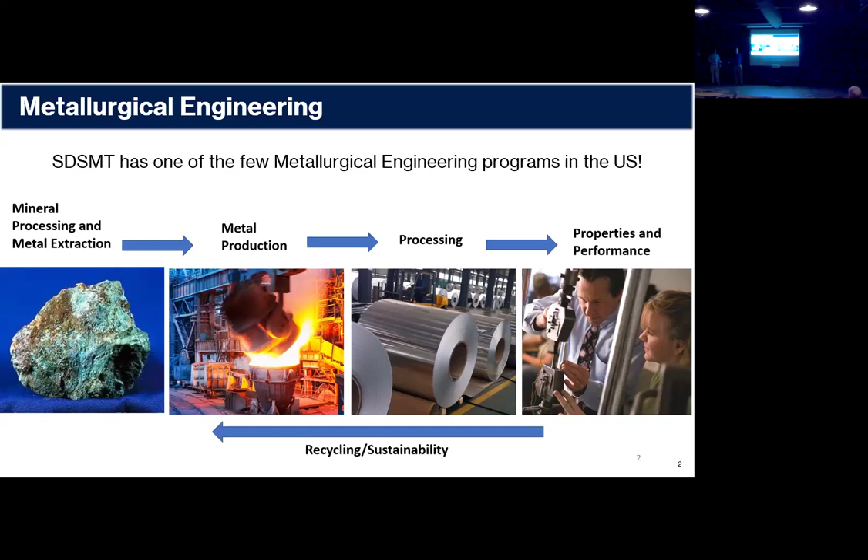Of great interest is the fact that metallurgy is one of the most important and fundamental studies for the upkeeping of our society, since we provide the raw materials, the raw metals, for every other profession in the world. The TMS Bladesmithing Competition is a biennial international competition hosted by the Minerals, Metals, and Materials Society. It started in 2015 to broaden the public's understanding of material science and to provide a competitive spirit to the students in metallurgy. You can consider this to be a lot like Forged in Fire, just a lot more technical, since it involves a technical report, a memo, and a video describing everything. Since its inception in 2015, I can proudly say that SD Mines has submitted a blade for every competition and has taken home many notable prizes.

The inspiration behind our 2024 blade is a sword found at the Sutton Hoo burial site on the eastmost side of Great Britain, specifically the East Suffolk region. Now, this sword was likely made in the early 600s, a period called the Migration Period, which marked a great turning in the time due to the invasion and incoming populations of Saxon and other such peoples. It was a great time of political upheaval and of major technological improvements. This sword was, without a doubt, wielded by a king to display his majesty and glory to all the barbarians who would come.

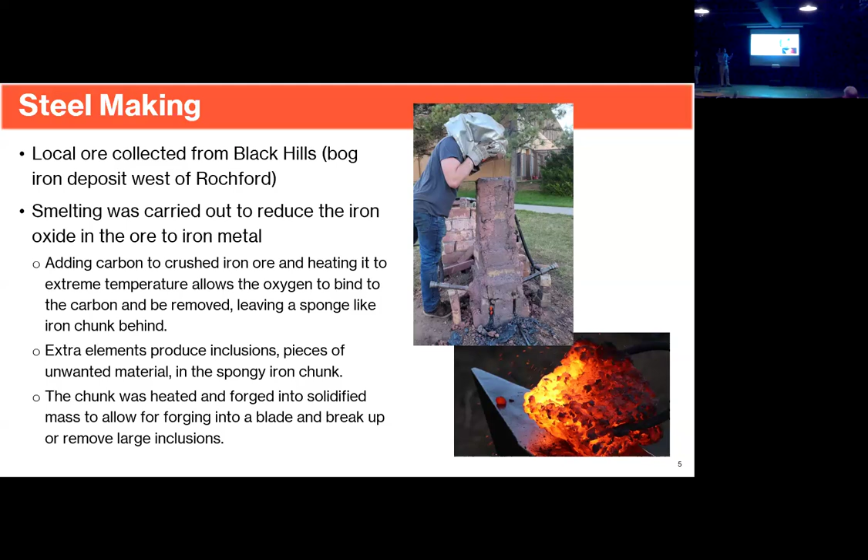Now, this hammering process not only consolidates the iron, but also drives out certain impurities that are left over due to it being a mineral deposit. And those impurities can lead to mechanical problems later, which we had to mitigate in some aspects by pattern welding. Now, the pattern welding also came into play due to that being used in the original inspiration blade.

The local iron was combined into a serpentine pattern with 1018 steel, which is a lower carbon steel, allowing it to better bind to the low carbon iron produced, which formed one side of the blade. And then the second side of the blade was formed from a 1084 and a 15N20. Now, 15N20 is interesting because it has a higher nickel content than a lot of basic high carbon steels, allowing for the pattern to become more visible when we etch it.

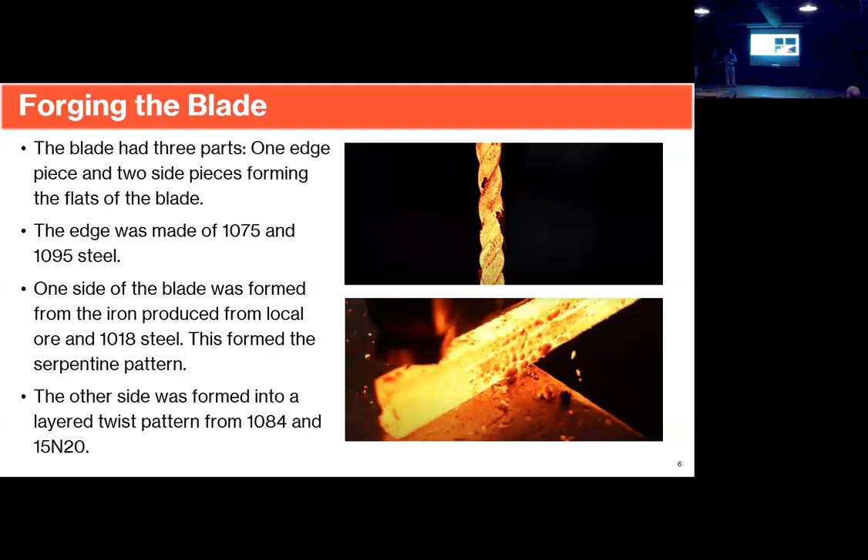These two were flattened, formed into the two sides of the blade, the flats of the blade, and then a 1075 and 1095 edge was added. For those of you who don't know, 1075 and 1095 are two very common blade steels that can be hardened and then tempered into a significantly more viable edge compared to a 1018 or the iron that we produce for the serpentine pattern.

This gets us into the pattern welding. This is where you're layering those various steel alloys that I mentioned. We're not just melting them together, we actually stack them, layer them, cut, fold, hammer into the pattern that we want, and then forge weld the pieces together into the blade.

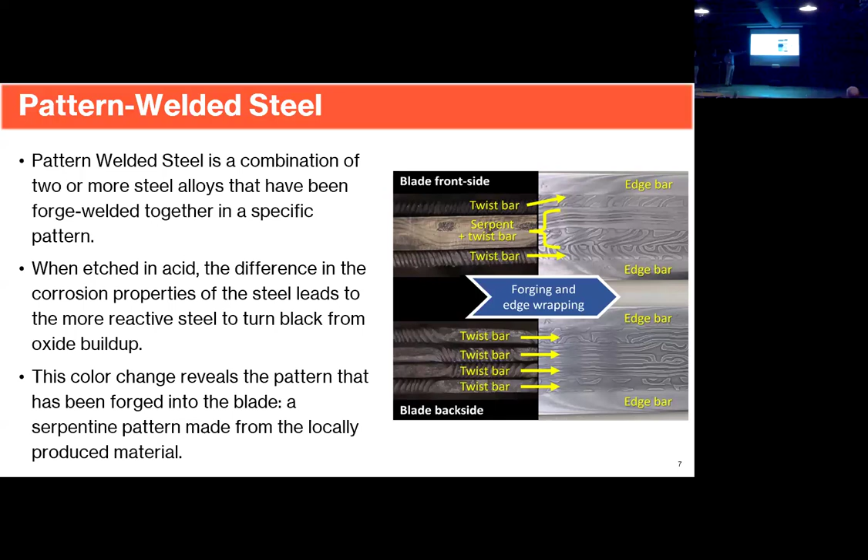So you'll start out with a block, hammer it out into a flat, combine those flats, forge weld them together, add the edge, and then shape that into the final blade length that you see there, which is then polished, etched, and, well, we didn't get around to sharpening it. And when you do etch it, which is generally in an acid etch, you end up with the pattern on the far right side where we have the serpentine twist, and then that twisted, almost wood-like bark layer.

Okay, so like Nathan just talked about the... Can you hear me now? Okay, testing. Cool. Good enough?

All right, so like Nathan just talked about, the forging is the process of getting the material to the shape we want, but the heat treatment is really our opportunity to tailor the properties to those that would be good for our specific application, in this case, a blade. So the two heat treatment strengthening mechanisms we used for this are grain refinement and martensitic transformation.

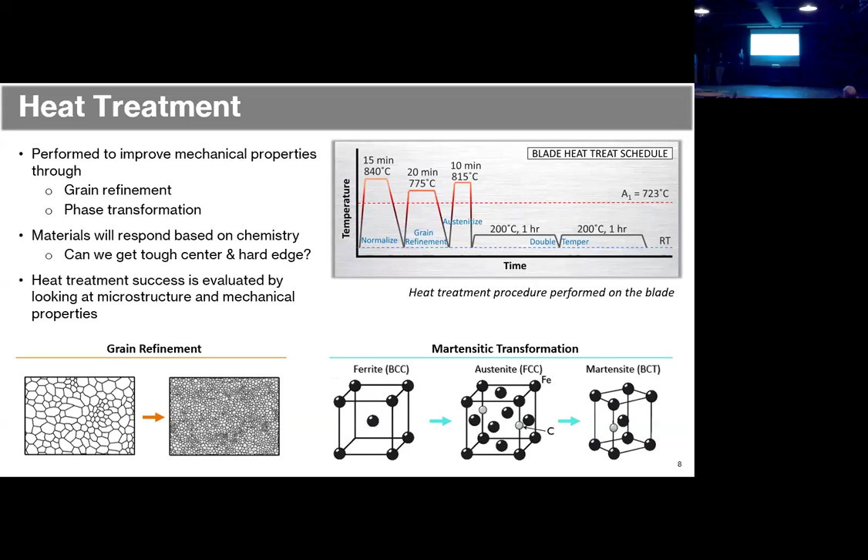Okay, so after we do this, it's kind of like baking a cake. You don't really know how successful it was until you cut it open, and then most importantly, taste it. So for us, that looks like cutting the metal open, looking at it with a microscope, and then also testing its properties.

So let's talk about this first. We can see that the grains did get a lot smaller. So like this is a whole grain here. And as we go through the heat treatment process, they get a lot smaller. Additionally, we go from this pearlitic ferrite structure to this martensitic structure over here. So the metallography shows that our heat treatment was successful.

And then we can talk about the numbers, the mechanical properties that we tested. So we did hardness testing, tensile testing, and impact toughness testing. Hardness is you just make an indent in the material and then see how far that goes, and you can test the hardness like that.

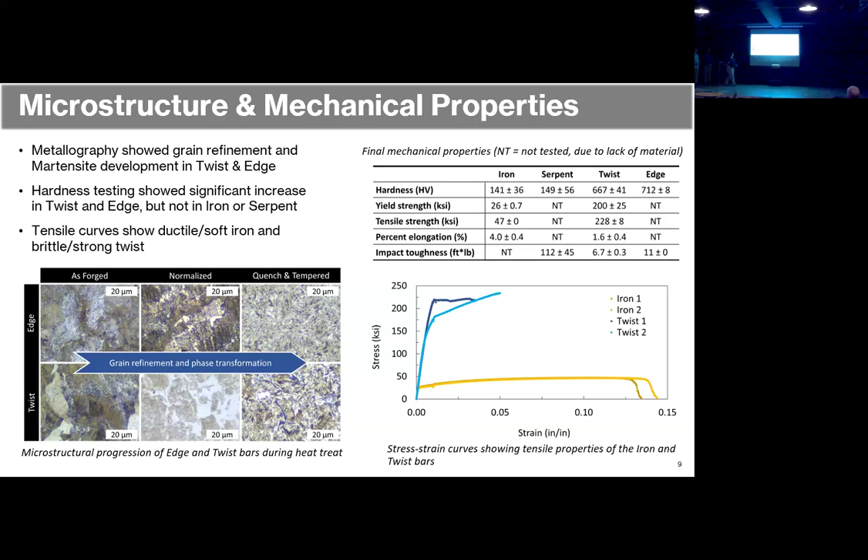All right, before I start, can you guys hear me all right? Yeah. Sweet.

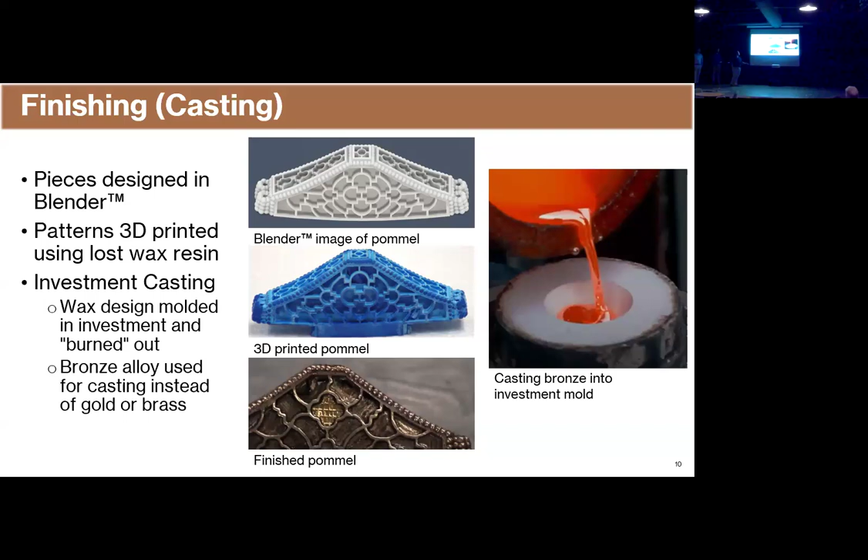And then because we wanted to stay true and have that gold design, we decided to research how to do electroplating. This allows us to use electricity to coat the bronze in the gold. So for that, we learned that aqua regia is one of the most common ways that you can dissolve gold to allow it to electroplate. It kind of looks like brushing on, but there's like a hum in the background because you're using electricity, of course. And it creates kind of this gold pattern.

And once that was done, we moved on to the garnets. So cloisonné is the method we used. It's a lot like stained glass, but it's reverse, where you make the outside pattern before you cut the pieces. And so having the pommel cast already, we were able to start working on the garnets. We got some from the Black Hills, but because they're smaller and more brittle, we had to supplement them with some from Idaho and India.

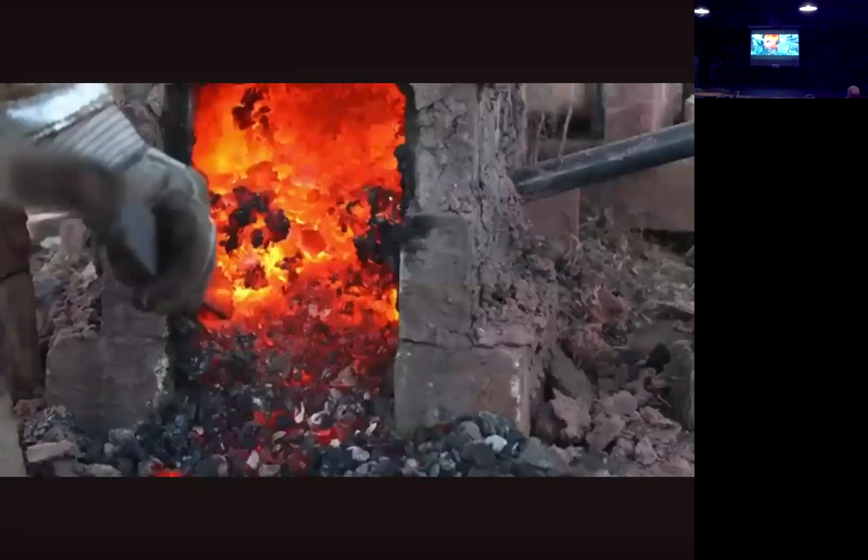Once the ore was collected, it was roasted, crushed, and fed into the bloomery with charcoal to begin smelting. The reaction was controlled by adjusting airflow through the tuyeres, and slag was periodically tapped to prevent them from clogging. Once the reduction reaction was complete, the bloomery was dismantled to remove the bloom. The bloom was repeatedly folded to create a billet with fewer impurities. Unfortunately, the forging characteristics remained poor, and X-ray fluorescence, metallography, and energy dispersive spectroscopy revealed the presence of high residual sulfur and impurities that made the billet unsuitable as a primary blade material.

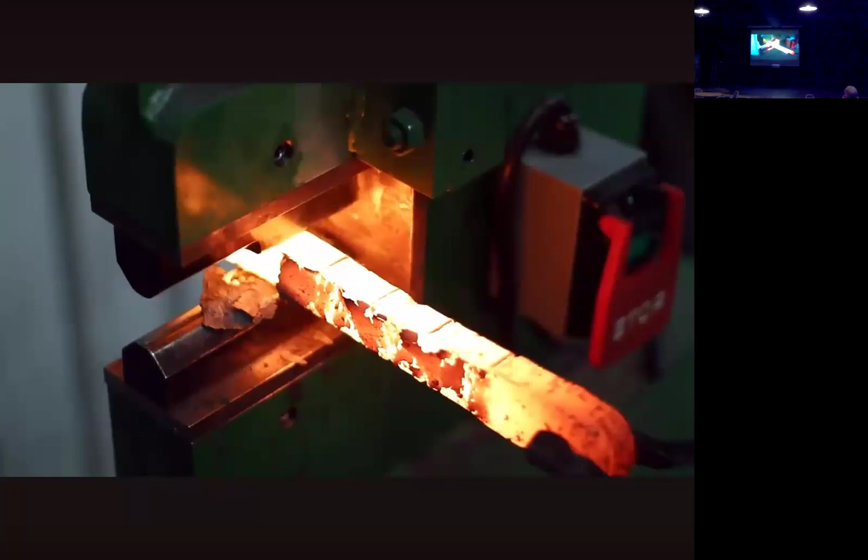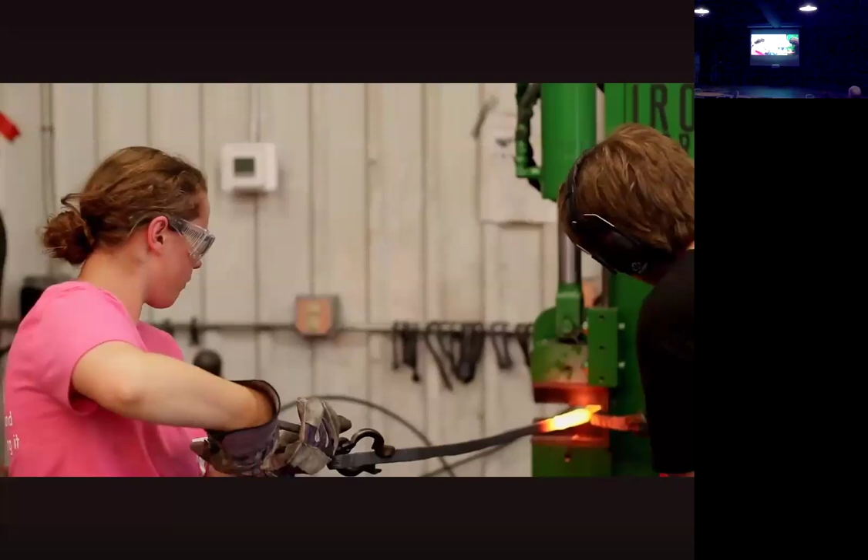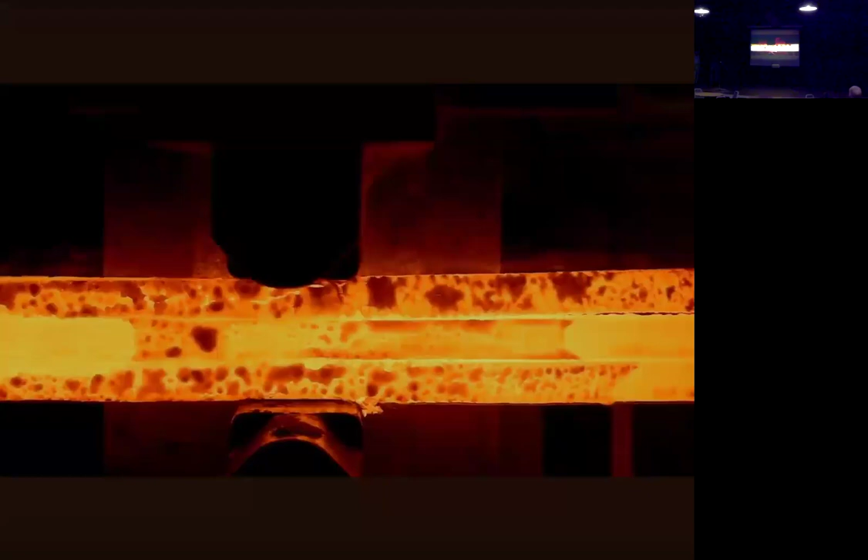Despite this, the team was proud of the effort put into the iron's production and decided to incorporate it at the blade center. The center serpent bar was made by forge welding the iron with 1018 steel. High carbon 1084 and 15N20 steels were forge welded together into 2 bars and twisted. These were then forge welded to the sides of the serpent bar, creating a new billet. Next, scallops were cut out of this billet and it was flattened to create the wavy serpent effect.

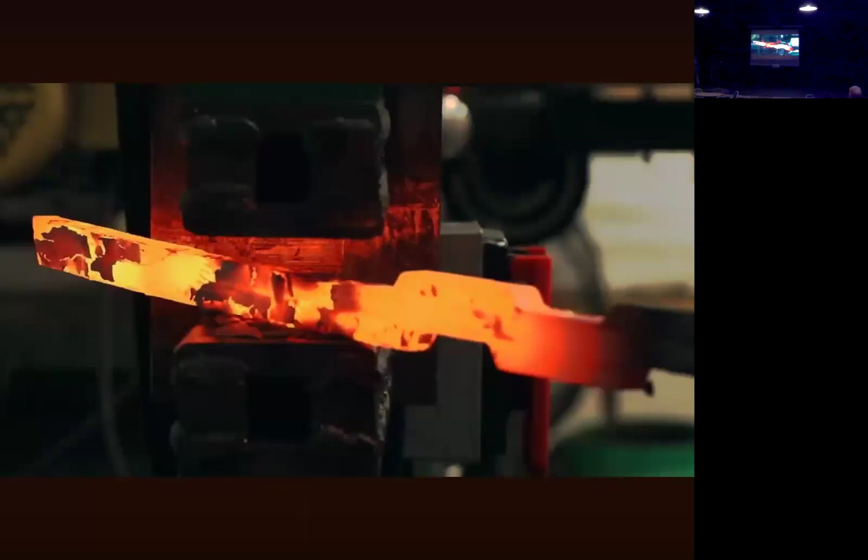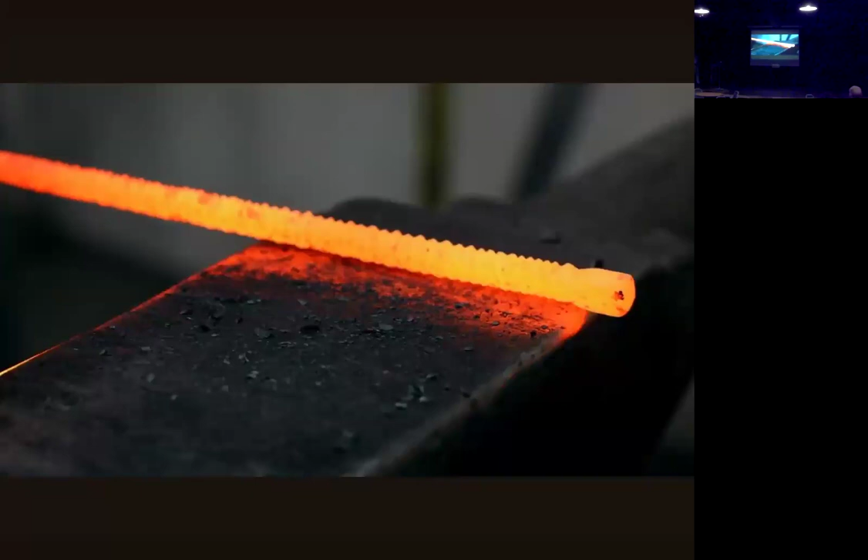6 more twist bars were created with 1084 and 15N20 steels. 2 were welded to the billet's edges to create the front face of the blade. The remaining 4 were welded to the back to create the back face. In this way, a double-sided pattern weld was accomplished.

A hard edge bar wrap made of 1075 and 1095 was forge welded to the blade core, creating a rough blade billet. Next, the blade was forged to shape and thickness, beveled, fullered, and ground to a rough finish.

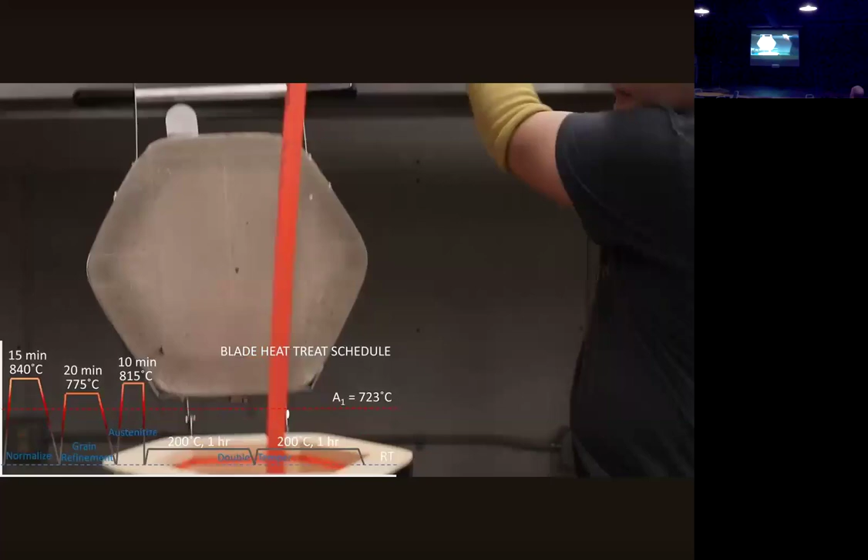After normalization, the blade was austenitized and oil quenched. A double temper completed the heat treatment. The blade was finished with hand sanding and etching in ferric chloride.

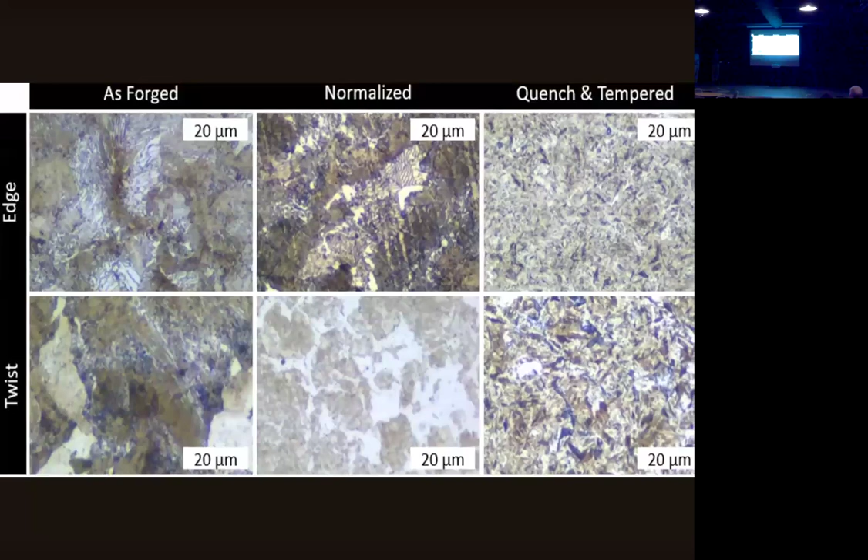3D modeled pommel and plates were printed, molded, and cast in bronze for sections of the handle. After the plates were cast, they were cleaned, polished, and filed. Following this, they were used to enclose a layer of horn and were riveted to make the upper and lower

guards. These guard plates, as well as the pommel and the waffle pattern foils, were gold-plated with a solution formulated by the team. Ebony and antler spacers were cut and shaped to make the handle. The guard plates and the handle spacers were then assembled, epoxied, and secured by peening the tang.

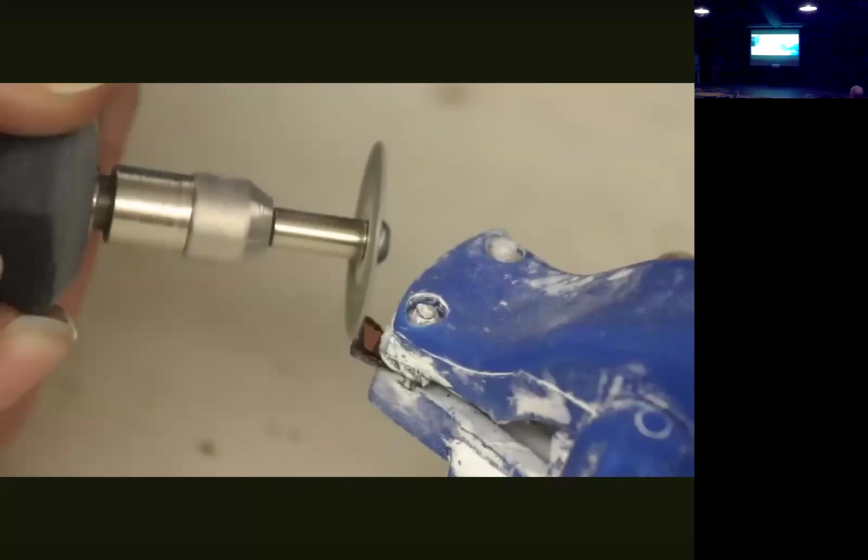For decoration of the pommel, Black Hills garnets found by the team, along with some from India, were selected. These garnets were ground to slabs and polished. Each garnet slab and a gold-plated waffle foil was then cut to fit the cells of the pommel.

Once the pieces were inserted, the bronze walls were peened using a punch and hammer. The pommel was secured, completing the sword.